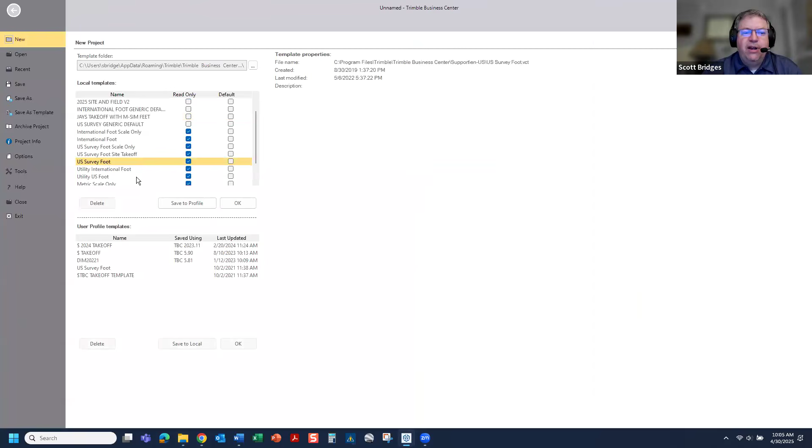You can start with File, New, and usually out of the box in Business Center, you've got some standard templates, such as U.S. Survey Foot or metric as well. If I hit Open to that, you'll see the blank screen and a couple of things as far as getting around in the system. I think this is fundamental in data prep for anything you're doing, and really fundamental in Business Center. How do you succeed?

There's really a couple of ingredients, in my opinion, in the secret sauce of Business Center. One is your templates, another part is your ribbons, and another part is really setting up some categorization tools. If you take the time to do that, you're going to have great success in Business Center.

Business Center is not complicated. It is very customizable. And here out of the box, you see all the choices open at the very top. So we're going to talk about thinning that down just to say, okay, we want to do data prep, whether it's data prep for takeoff or data prep for 3D models. Where do we go to do that? I'll try to slow down this morning to kind of go through some of these settings.

So number one, there are multiple places to customize Business Center. You can go to the Support tab, go to Options, and control your colors right here. Everybody sees a little different. Again, how do you have great success in Business Center? Maybe you struggle between oranges and reds and browns. Change your colors in your settings right here so they work with what you want.

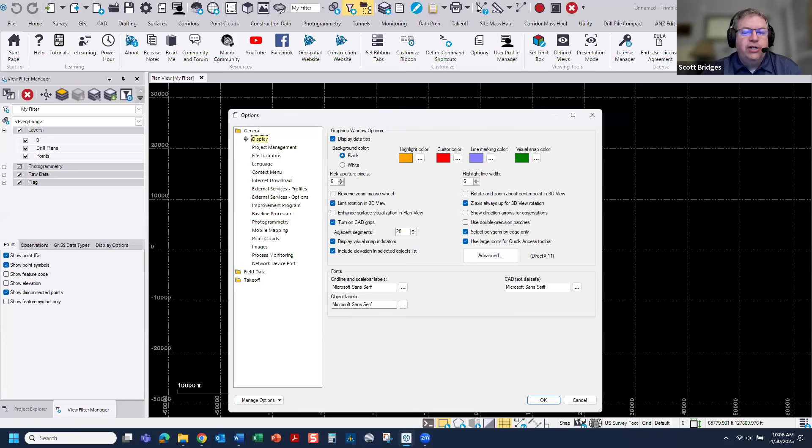Also, change your cursor pixel size. Make it a little larger, such as a 6 to 8 right here. If you've got a high resolution screen, it's easier to see. There's also, a lot of people miss it, a large icon item right here, which gives you the large icons to show up.

So a couple of things at the very beginning. You can show your quick commands at the top, or if you hit the very right, you can show them below. They're a little quicker to get to that way. So that's a couple of settings to start customizing.

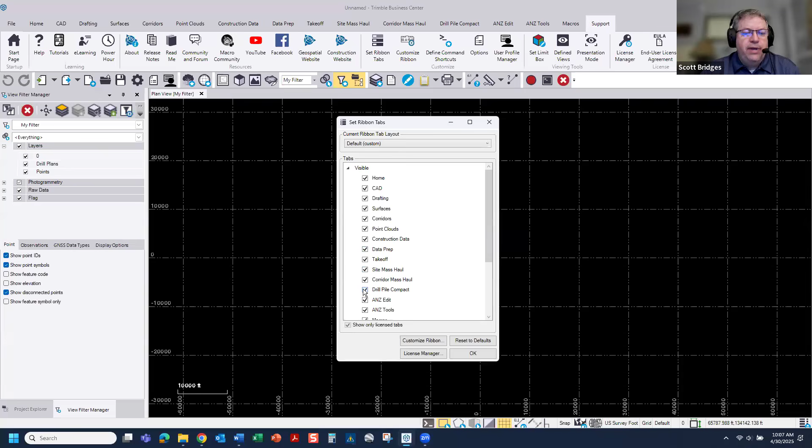The next part of customizing is you can set your ribbon tab. If we click the Set Ribbon tab, we get to see our options right here. What do we want to do? If there are things we do not use, we can turn those items off. As we turn these tools off, you'll see them start to disappear across the top. So we have different things we can turn on and off depending on what we're trying to do, and our menu gets smaller at the top of the screen.

The other thing we can look at as far as customizing is really our ribbons right here, not only the tabs, but the ribbons. So another part of that, to really get your workflow - if there are things you never ever use, I'm a big fan of turning those off. One of the tips and tricks: if you right-click on a ribbon and go into Customize, we'll go in and do a few things to show this correlation very quickly here.

If I scroll down, you see at the very top of my screen I have the Takeoff tab. On the far left, I have the Digitize options right here. Those show up right here under Customize. I've got Takeoff, I've got Digitize, and there are things I'm not going to do, such as talk to a digitizer. We can set these up and just hide those items - we can turn around and hide the digitizer setup.

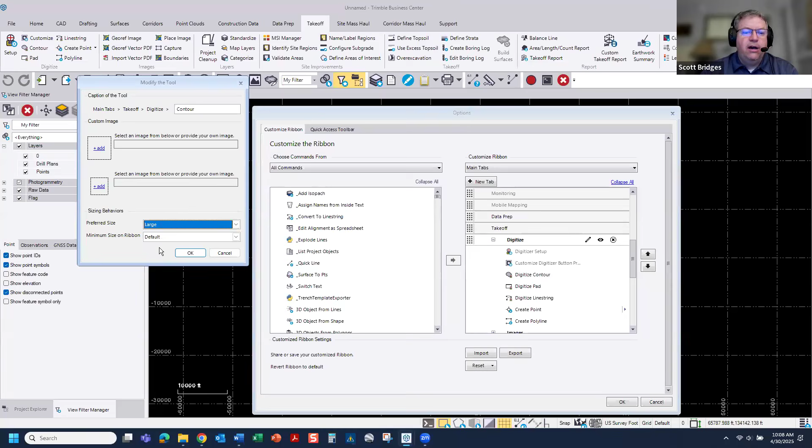We can also take an icon that we're going to use on a regular basis and make it a large icon. So this is the only one I'm going to show and do, and then you can move the order around. If we do that, before I hit OK - if you look at the top corner, the way it looks right now with this digitizer icon - when I hit OK, you see that it rearranges. So you can do that for every one of your tabs, every one of your ribbons, and rearrange it.

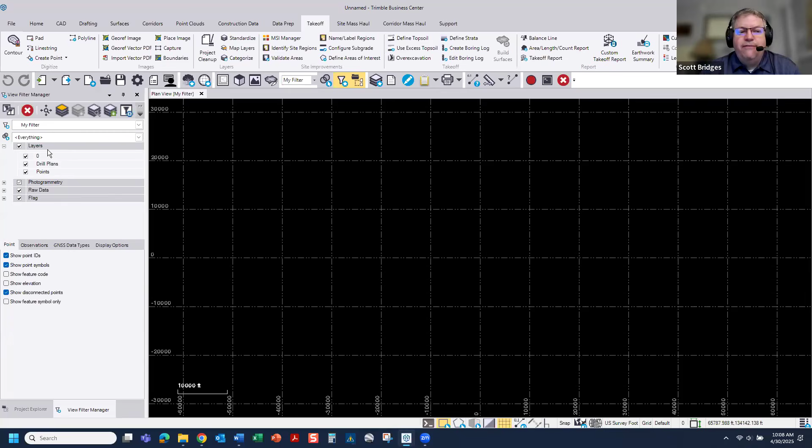The other secret sauce ingredient is setting up your layers ahead of time. Out of the box you just have a few, like zero and drill plans and points. If you want to do data prep, you want to have these built out. Early in my career I used to change layer names daily - maybe original ground today, existing ground tomorrow, then OG - something different every day. That's not how you succeed with data prep.

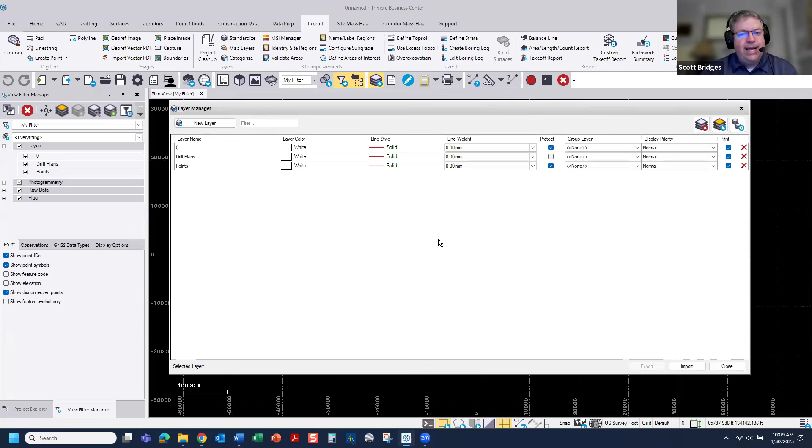You want to come up with a set of layers, and most professional data prep modelers have 100 or a couple hundred layers they use every day, so every file is identical. The layers for existing are the same, design are the same, and everything works exactly the same every time you use the software. So if you'd like to see how those settings work, here we'll go File and New.

Here's a simple construction template I made. After this is over, if you'd like to have this construction template or ribbon tab, feel free to reach back out to us. Albert's email will be up, and mine is as simple as my name, Scott underscore Bridges at Trimble dot com.

Here's a template. We'll open it up, and immediately you'll see that we have the layers in place. So here's the layers for existing and design, length area, trenching, and roadway and reporting.

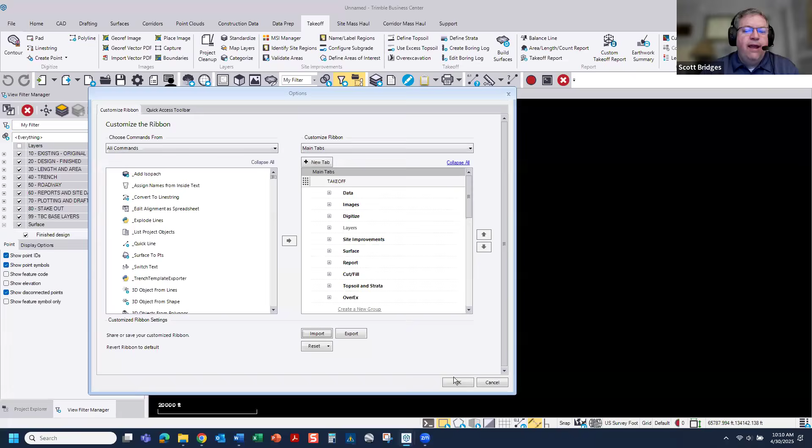Very simple. The other part to customize this is right-click on the ribbon - right-click on the top and you can customize the ribbon just like we did before. Once you've got that set up, we'll use Import, and here's one I've created, just this construction ribbon. If we hit OK, you'll see that we have greatly streamlined our interface right here.

These are the main tools I use over the last year working with a few customers and dealers. When I want to just do takeoff and data prep, I have it down to about 6 icons that I use. We can add a roadway if we need to, or utilities if we need to - those are easy enough to turn on and off under the tab menu. So that's a little bit of the getting going here.

Now let's talk about some data and bringing data in and using it. First, success with Business Center for any kind of data prep is having a wheeled mouse. With a wheel mouse, you can zoom in, zoom out, and right-click to pan.

Let me go grab a simple set of data to start with here. I'm going to take something as simple as a little DWG file right here - I picked it up years ago. It's a very small file, and I'm going to take it and drop it into the system. You can drag and drop to bring things in.

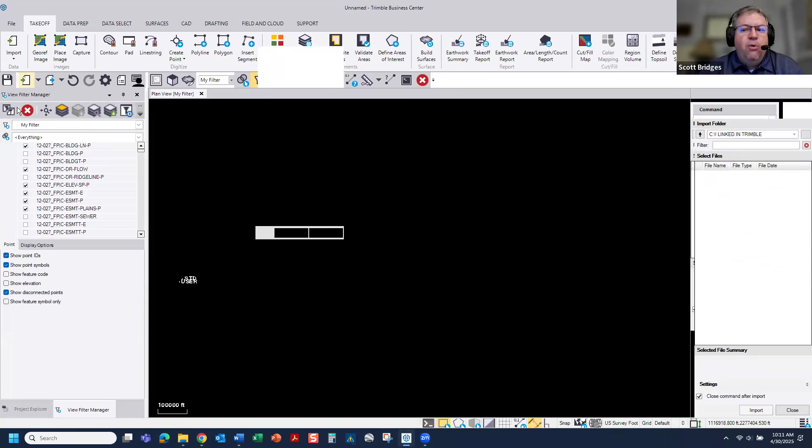Within Business Center, at the very beginning for data prep, you can drag and drop, or you can use the import option. Import is another choice - either one gets you your data. There's a couple more settings always when you use the import.

If we're talking all the tools of the trade for data prep, the import will let me go in, and when I pick a file on the side of the screen over here - here's a DWG file on the right side of my list - there's a little double caret at the bottom. If you take a moment to open that, you'll see all your settings.

These settings apply if you're using a PDF file - you can change the resolutions. If you're bringing in a CAD file, you can check your units. You can also add a prefix right here. So if I were to import 3 or 4 CAD files at once to work with, I could come in here and say File 1, 2, and 3, or Revision 1, 2, and 3. As I bring that CAD file in, you're going to see that information added to each layer. So some really good settings if you use the import options in TBC.

So here we are, and I have dropped in a very simple CAD file. Now what do we need to do with this data? If we look at our View Filter Manager, we have the Project Explorer and the View Filter Manager. Both of those I would keep open all the time.

These two tabs for Project Explorer and View Filter Manager are also listed at the quick command icons. One looks a little like a funnel and one looks like a file folder. These two I would keep open for everything that you're doing.

So we've imported a simple set of data. Now if you notice the layer list, some layers are turned on and some are turned off by default. This is based off the AutoCAD settings that brought them in. So if they were turned off in AutoCAD, they're going to be turned off in the system automatically. You will see the layers on versus off right here. I'll go ahead and take a moment and turn all the layers on.

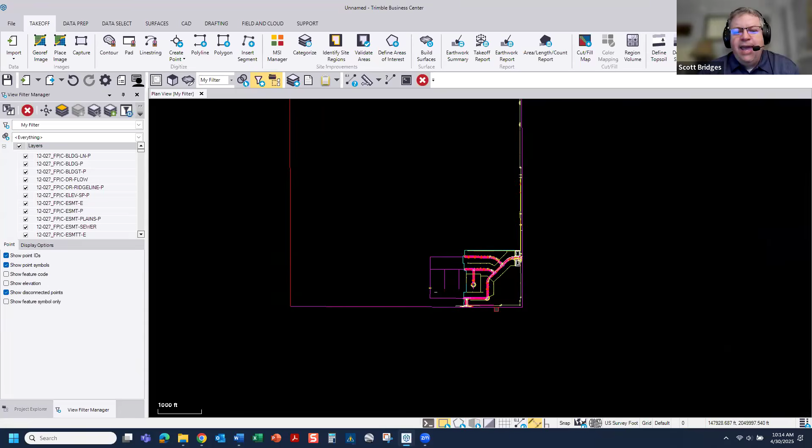So odds are that data is not part of the same file. Some data could have been a 0,0 or an insertion point. The data that I want to get to is on the far right side right here. I'll take the time to zoom in and look at my data. So here's what I'm after. Again, there's data over 2 million feet away.

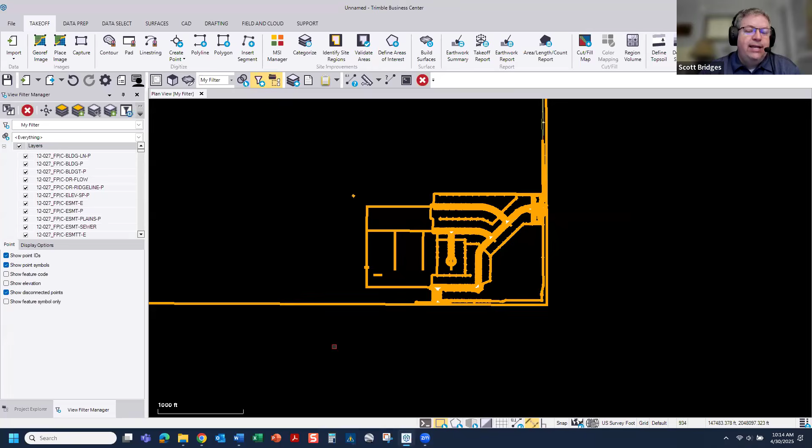What's the easiest way to manage that? In the past, original kind of CAD 101, you could kind of bite it off like an apple and delete, delete, delete. But here what we're going to do is just highlight the data that we want. If you highlight the data from left to right, it selects what's inside of your selection. If I go from right to left, it's a crossing select and gets everything else that it touches.

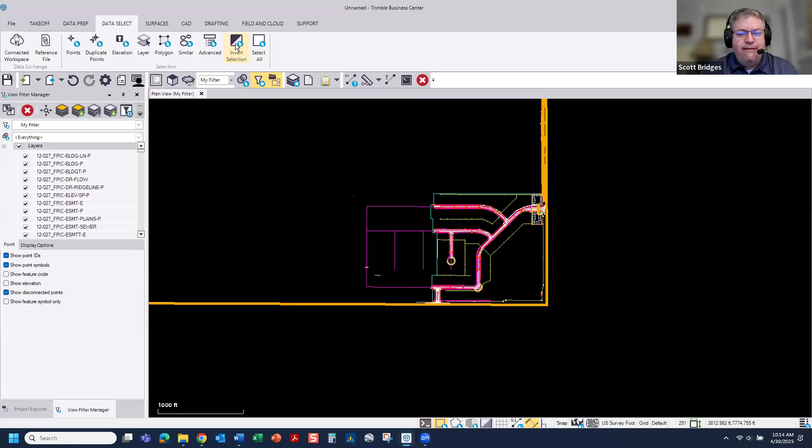So I picked the data that I would like to use. There's a great tool in TBC called invert selection. Invert selection will take the data that I have and flip it around, selecting everything else that exists in the entire file. By flipping that invert selection, you see it's got data outside of it and further away. If you look at the bottom, you can tell how many items that was, 291, and I will hit delete. By hitting delete, it zooms in and gives us just the data that we want right here. So here's the data that we're after.

You can also use another tool to start with for cleaning up data, under data prep. Data prep lets me go through and use project cleanup, and this is going to really wash through and clean up that whole file. But before I run this command, I want to take a moment and look at a few things. If we look on the left side of the screen, we can kind of see all the layer names. And if I keep scrolling down further and further, you see there's a tremendous amount of information right there. There's a lot of layers.

Probably not data on all those layers, but we're not sure yet, so we can use data prep to clean those up. And project cleanup will go through and take this list of layers. I'm going to take everything here, and I want to remove the duplicate lines, the overlapping lines, and the unprotected layers. That means the CAD data that was brought in, we're going to clean those up and remove that data. So let me hit apply.

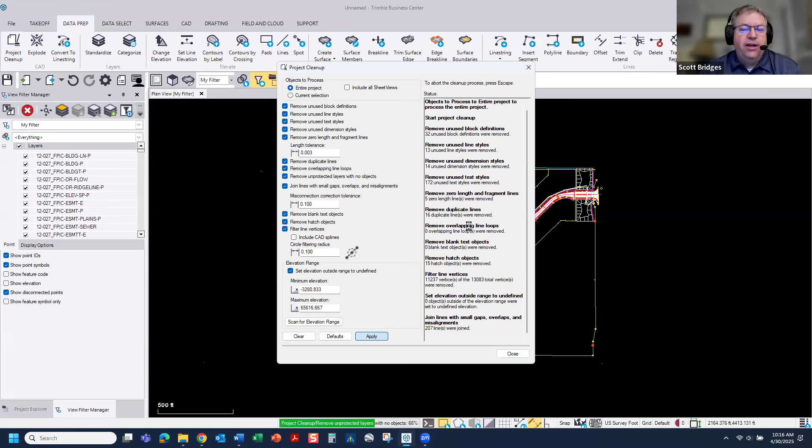Let me do the entire project and say apply to that. And we'll go through and take a look. 16 duplicate lines were removed. Good luck trying to find those that are duplicate.

We can also remove vertices if our lines are extremely dense. That is a user choice depending on what you're trying to do from a modeling standpoint. We can join lines, but the big one to look at is there were over 600 layers with no data whatsoever. So we just cleaned up and removed those 600 layers with no data. Now we're down to just data on our particular file right here.

One more thing to look at in this particular file before we move to another exercise is the fact I'm a big fan of, under View Filter Manager at the very top.

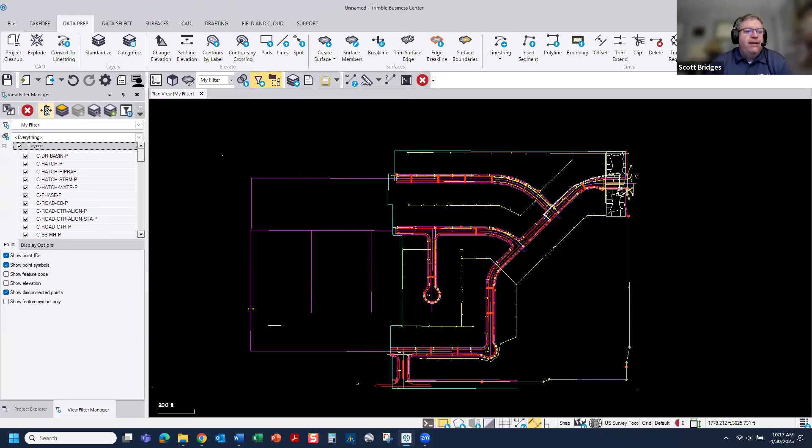If you look at the top, you've got a couple of extra choices, including Zoom Extents and Isolate. These are extremely valuable when you're working with your data. If I hit Zoom Extents and Isolate and start at the very beginning, that picks my very first layer. Zoom is on and Isolate is on.

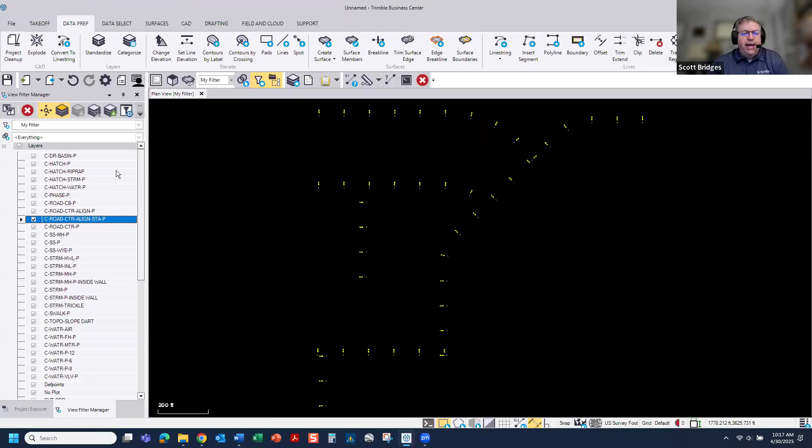By doing that, just using the down arrow on your keyboard will scroll through and let you see what's on each layer individually. So you may have something as simple as one piece of text or one line, but you can scroll through and see that data, look for what you're after, delete data, edit data, and manage data.

So that's a couple of starting points right there from data prep: realize you can take a really big file, go through the project cleanup, and get rid of the empty layers. Also, click through your layers using your zoom and isolate to pick the data that you need. So that's exercise number one that I wanted to share.

Now I want to take a minute and talk about bringing in some more PDF data and elevating some information. We'll take a few minutes and do that. Then we're going to get into a larger CAD file and we're going to do a pad and volume. We're going to see if we can get all that done in about 30 minutes right here.

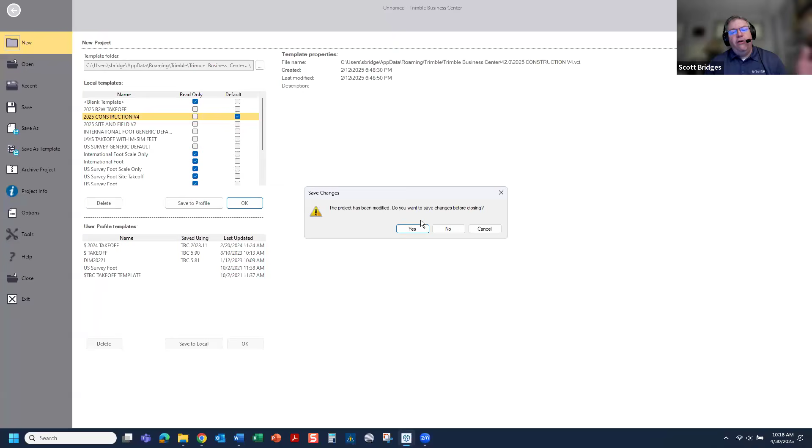So let me hit File, New. And again, now I will use this template, so all the other settings are turned off. Here we are with an empty file yet again. So now you have a couple options: if we want to use the import option, we can use the import, or we can drag and drop.

If you're working with any PDF data for any reason, if you're trying to match it together, if you want to match together a PDF to CAD to verify your information, if you want to stitch together multiple sheets, use the import option. A lot of people may not realize this, but by using the import, selecting a PDF...

If we look at the very bottom in our settings right here, number one, we can change the resolution on the data. Here I've made it a 300. Also, you can select the page number. If you happen to have a PDF that you want to work with, and that PDF is in a large magnitude of 50 or 100 plus pages, there's no reason to bring all of that data in. You may just need a couple of sheets. You can go through just like printer sections and say page 1-5, or page 1, 10, 20, however you would like to import that data.

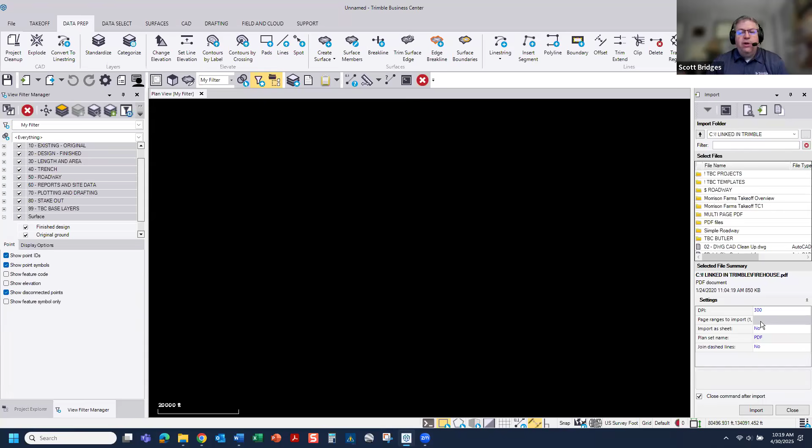So here we'll import it. Really what I want to show here for just a few moments is the concept of managing your data and even data prep, even if you were doing takeoff for just a moment. So here we have a PDF file. First thing you would always do is scale it. If you bring in a CAD file, you're going to have that information already in the right coordinate system.

Here we'll take this PDF, and I am going to click 2 points to scale it. Now, at this moment, I don't know if it's rastered or vectored. We're not going to go through a takeoff exercise. Actually, we're doing that one month from today, where we'll just go through and put in existing and design and do a cut fill calculation.

But what we're going to do here is look under Project Explorer. Whether it was a CAD file or PDF or anything, we can see that we've imported data. We would see we've imported CAD data as well, but right here I've got a PDF.

Just so you know as well, when you're working with any kind of PDF data, on the left side you'll see a V, or either it will be blank. A V means that it is vectored data. So vector data, something should exist and I can extract out of this to work with.

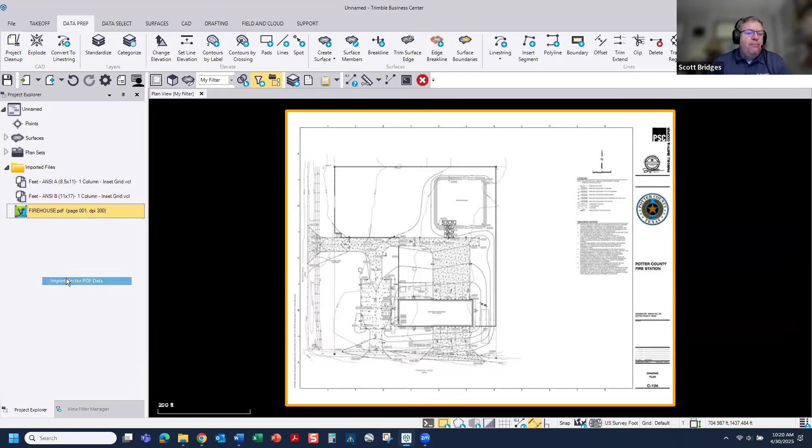So right here, I'm going to right-click on this data, and we're going to import the vector PDF data. So we'll go and import, and what I want to do from a little data prep on this is just to show how to standardize the information and put existing on existing and design on design. You would use the same information for CAD data, and also you would use it for any kind of model building as well. So when we extracted that data, we see that we've got a lot of information on our screen right now.

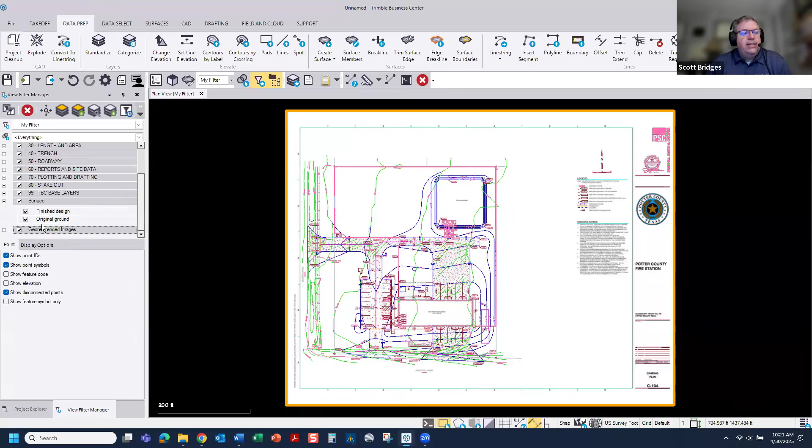This just shows up under the native layers that it extracted. Let's take a peek at it, and here's how much data it extracted right here. So it pulled out this much data from that PDF without me having to do any digitizing.

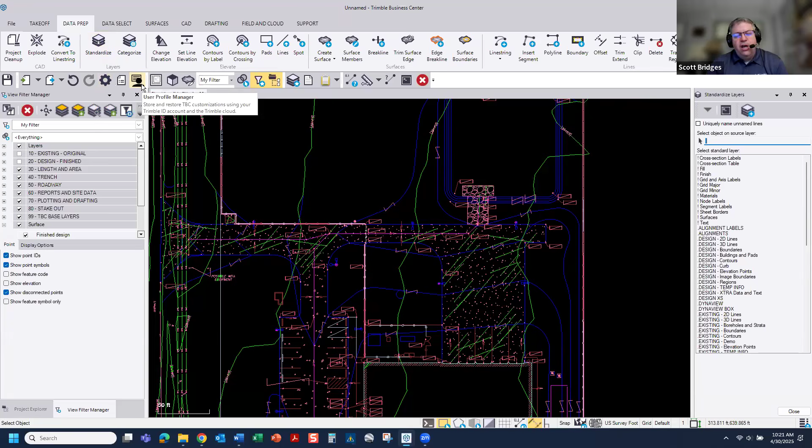A couple little tricks: if I turn off the layers I created in my template, my existing and design layers, nothing is on those yet. What we want to do briefly is use a standardize tool. This is a great place to start for any CAD data or PDF data where we want to put things on our particular layers, because if you change the name of existing or design every time, there's no consistency there, no way to win. So we really want to make sure everything's consistent.

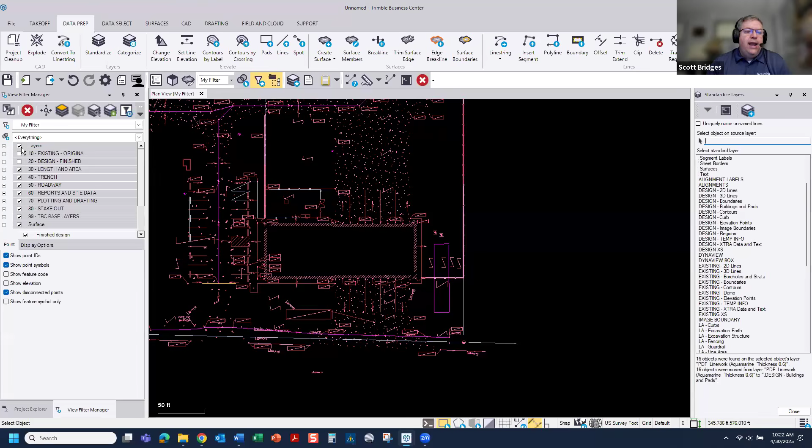So if I click on one of these lines, if it came from a CAD file or any other source, I can assign it to be existing contours, and it will move it to the existing contour layer. I can also pick lines one at a time or in groups. Here's another line that needs to be design contours, and if I zoom in here and click one more spot, this would actually be a design building. By moving those over, now we can turn off all the other data that exists, and just turn on the data that we want.

There's the existing data that's kind of messy at the moment. That will be a takeoff exercise in the future. Here's some of the design data, and let's turn back on that georeference image. So really, for this exercise from data prep, I just want to show a couple things.

The name of the game for all data prep is turning 2D data into 3D data. That's what we have to get to, 2D to 3D. And there's a couple of tools available for you. So really all I want to work with at this moment in this file for this exercise is coming up with the elevations on this apron right here, just around the edge. So a couple of things we have to do.

If I click one piece, we can always check properties. So if I click on an entity on the screen, I see that it's on a layer I would like differently. I don't really want it on design contours. I want it on another layer, and it's broken into individual pieces. So how would we go through and clean this information up so it's ready for us to use? It's a very simple process.

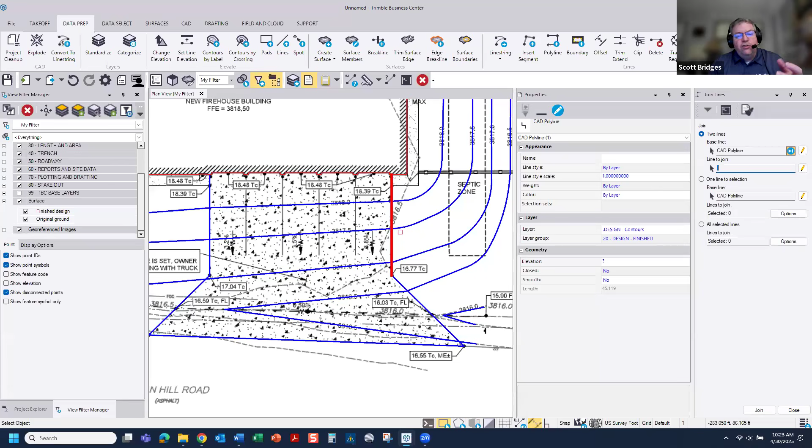I can click, and do this one of two ways: use Control and click each piece, or right-click and immediately join. Either way, I would like to do that. Here's where that thickness plays into your settings, you can see the line is wider, and I would like to join that piece and these other two pieces right here. So we'll join those together. Now that is joined into one entity.

So I've got it joined, but now I'd like to change the layer of it. Instead of contours, I want to turn that into a curb where it's supposed to be, and we'll turn everything else off on the design right here. I'll turn everything off except design curb. So what we have on the screen now is one line that we can take a look at.

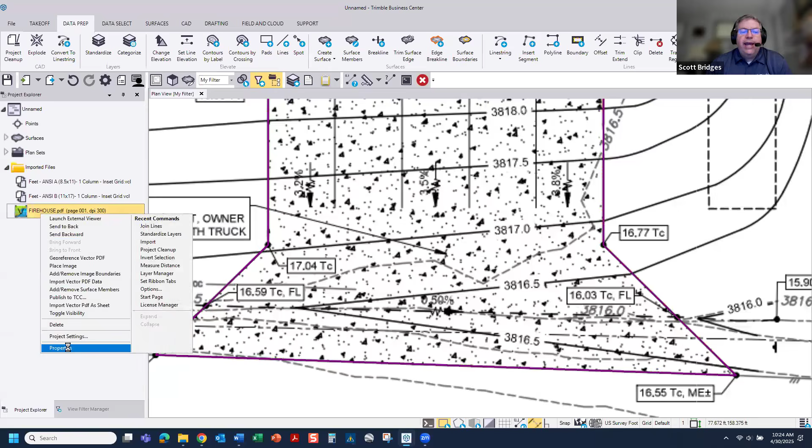Another great tool that's available if needed: here's this line, I'll highlight it so you can see it on the screen a little bit. If a PDF is a challenge to look at sometimes, there's another couple of settings people have missed as far as data prep goes. If I have a PDF in the background, I can go into the properties of this PDF. One of the properties is you can change the transparency, and also change the visualization style. Here, I'll dim this PDF so it's a little darker so we can see the work a little cleaner on our screen.

At the moment, I don't know if this is 2D or 3D data. I do know it because I extracted it from a vectored PDF, but if you want to also know whether it's 2D or 3D, under Display Options, under View Filter Manager, we can come in here and change this.

So I could say if my data is not elevated, show it in an alternate color. What it will do is show everything that has no elevation in red, or pick any color you would like, a yellow or another color. I'll try to show that in just a couple of moments how we can do that.

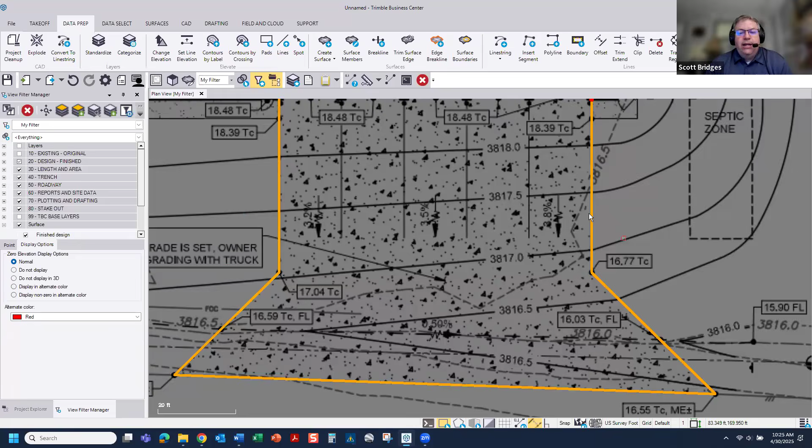So let's go, how would we elevate a simple line on our screen? Number one, we can click it and go edit it. If you right click, edit is an option within your settings right here within TBC. So we'll right click and say edit, and this lets us grab our information, and we're grabbing node to node.

This is really what I want to show for just a minute. Number one, which way does the line go? If we look, we see a little crow's foot arrow on the screen, so this line is drawn in a clockwise direction. If we need it changed to the other direction, we can simply reverse the line direction right here at the top of Edit Line String.

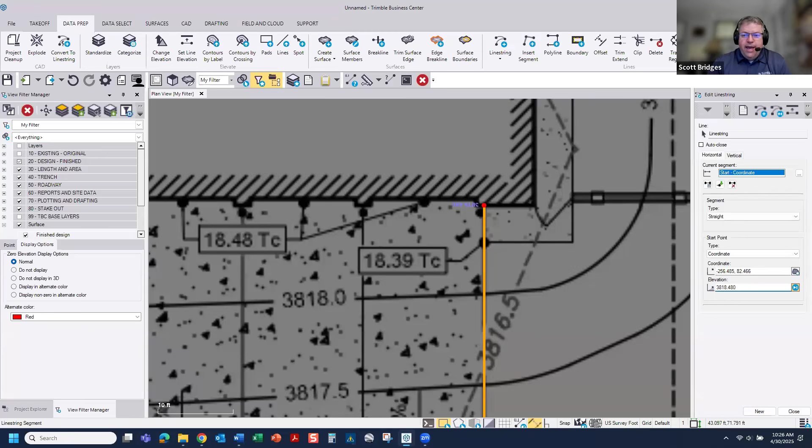But I'm going to grab the very first point, and that elevation should be, there's a 38 at the beginning of these. So this particular starting point, if we zoom in, let's make that 3818.48. That gives me a starting elevation of that particular line, 3818.48.

If we go from here, the next point that I can give it, node to node or intersection to intersection, is down here. So if I assign that a value, that should be 3816.77. So we've assigned two of those.

But there's a couple things we're missing, and we're missing one in the beginning. We're going to have one that we're going to come up with and need at the end. What are some of the tools that we've got for this?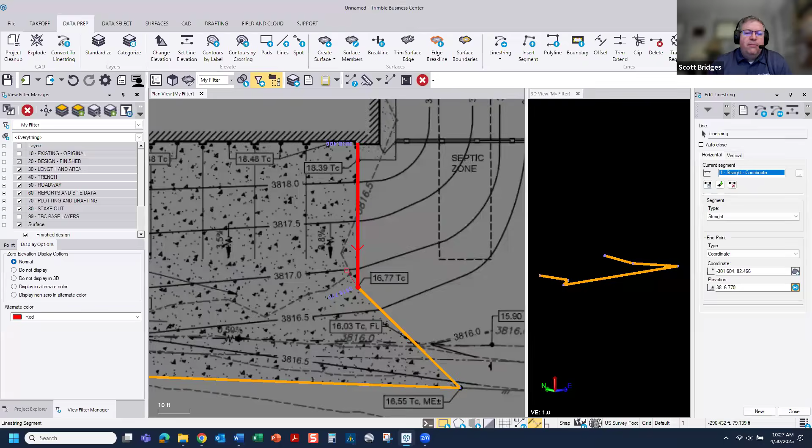Number one, we can also work in 3D view and see the data at the same time. So here I'll open up and see that we've got a piece of this line, and it only has an elevation at the beginning and second point. Let's go in, and how would I elevate where I don't have a point location?

On the right side under the Edit Linestring, so far everything I've done has been under the horizontal control. Horizontal lets me click point to point or node to node, basically from vertice to vertice right here. But if I go to the vertical tab, if you notice in the Edit Linestring, there's a horizontal and a vertical.

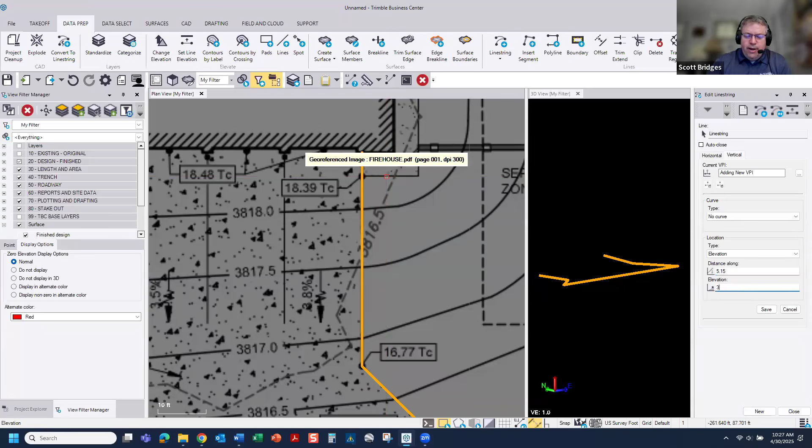If I go to the vertical option, it is letting me rubber band, as you can see on my screen, anywhere that we're working, and I can come right here, and we could zoom in extremely tight if we wanted to, and at that particular point, I need a 3818.39.

That gives me a different control, which you can see in the 3D view, and you can also see from the plan view. Then we can come in and add another node. Right here, I'm going to click at this spot and make it 3816.03, and so on and so forth.

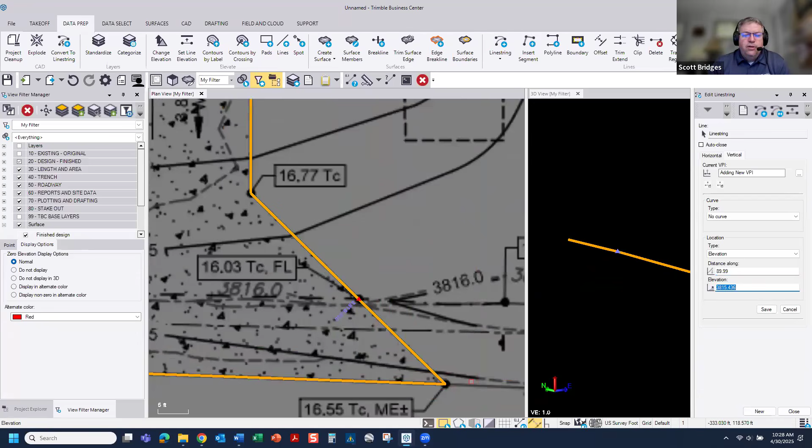So this lets me go around and add specific points anywhere I would like on a line right here. So that's really the exercise I want to show specifically here, that you can interact with a PDF file, you can extract data from the PDF, or you can tie a PDF to a CAD.

Either one of that can be done right here, but as you go to edit a line, not only can you edit it at a point-to-point, node-to-node mindset, you can also, anywhere along the line, edit by going into the vertical tab. So a very key part in doing any kind of data prep tool right there. So I'll pause with that one.

The next exercise is let's just talk about how we would elevate a lot of data and how we would quickly put a pad on from a volume standpoint. So we'll come in here and do one more.

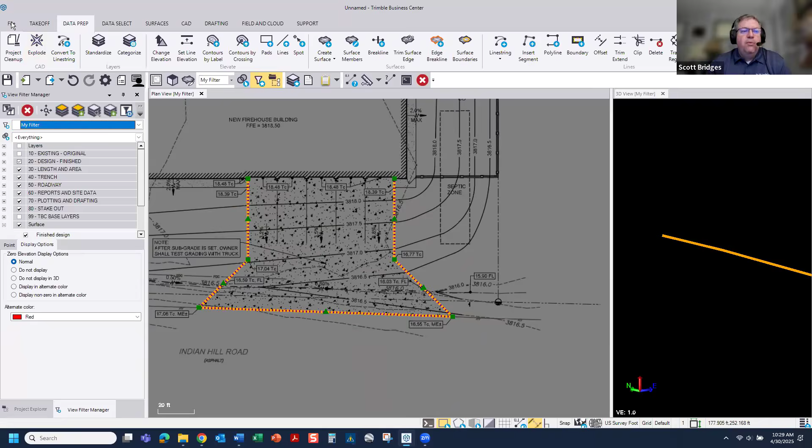Let's go File, New, and I'll use my same template. As you see, I have to move very little between menus by having a custom template. So by having a simple template right here, everything I get to do, I get to stay in one or two menus, and I don't have to bounce around from place to place. So it makes it much easier to work with staying in a small spot right here.

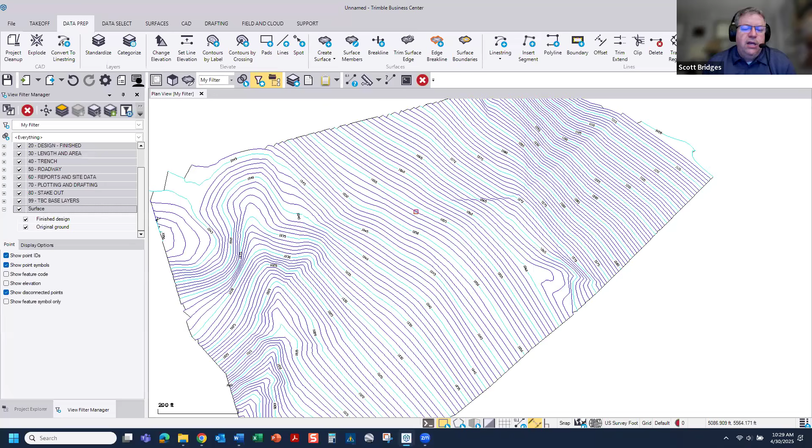So let's go through an exercise on bringing in some data, and let's turn a large set of data from 2D to 3D so we can see how we're working right here. I'll bounce around between my screens, black and white, depending on what you're doing. This is a setting at the bottom that you've got access to right here.

So here we've got a set of contours. You can see they have elevation labels, but at the moment we don't know if they are 2D versus 3D. We don't have that information. So a couple of things we can do.

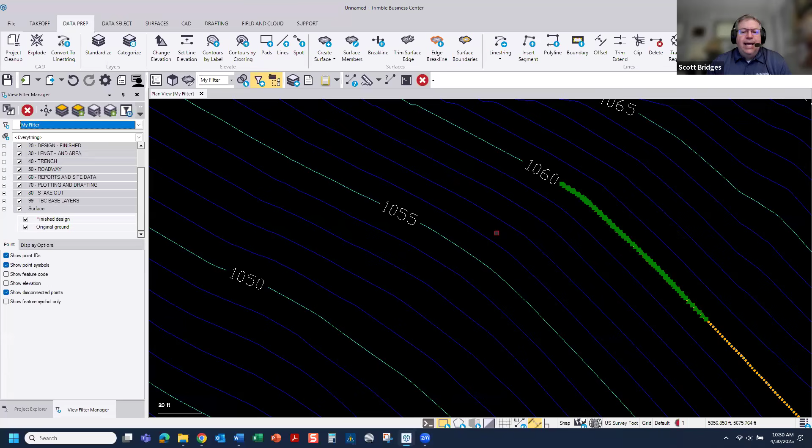We can click a line and right-click and go into Properties. So if I click this line and right-click, I notice there is no elevation in the geometry section. Maybe I just picked the wrong line, maybe it's an anomaly. So if I go pick another line, we see also it has no elevation. I'll pick one more, and no elevation. So all of a sudden I realize, even though this is a labeled file, there's no elevation on it.

So now we need all the data prep tools to convert this from a 2D to a 3D and get a file elevated so we can use it for anything we would like to do. What order would we do this in? How would we manage this information? Well, first I would go through the same process on data prep here, and I would standardize my data.

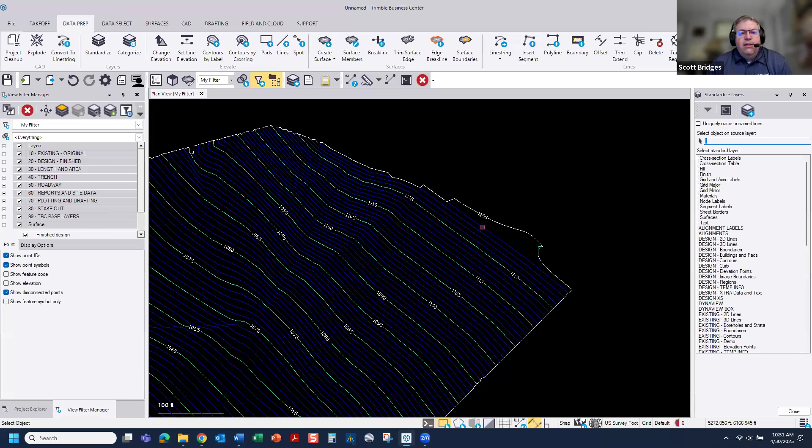I would pick this information on the screen, and I would turn it into my design contours. I can pick the other information and turn that into design contours. I can turn these labels into design contours too, and move things wherever I would like to work with that data. So let me take this text right here, and we'll move those to design text. There we go, so we've got these moved over to whatever layer we would like.

We can turn everything else off. We still have two-dimensional data.

Now we want to go through the data prep process of contours by label. Right here is the command, contours by label. First we pick by layer. So if we pick by layer, I select all my contours and all my labels right here.

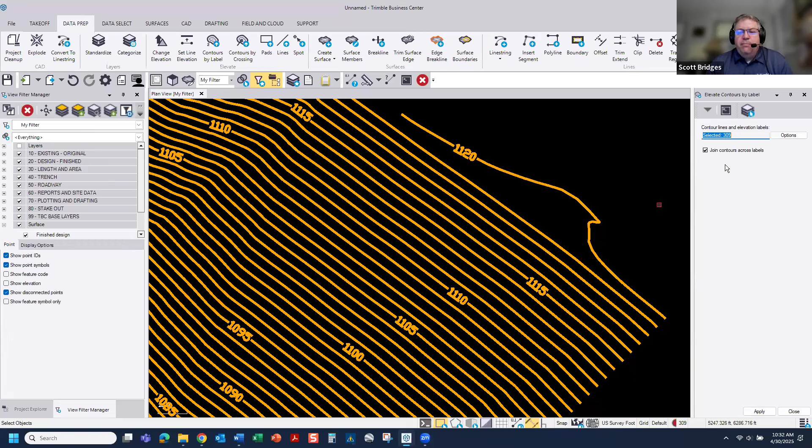By picking those, it's going to say, do you want to elevate? The tool we're using again is data prep, and we're doing contours by label. We pick our lines, we pick them by layer, we pick the text, and we want to apply. And it immediately elevated 107 lines for me automatically. So it uses the labels, and it does it.

But at the moment, it's tricky to see what's 2D versus 3D. I can't really see that at the moment. I'm not sure which one is 2D or 3D. So let me look at it a couple of different ways.

Let me turn on a 3D view and show this information. We can see this is my plan view, and if we turn it, we can see the 3D. So that's the 107 lines that we've just elevated on our surface right there.

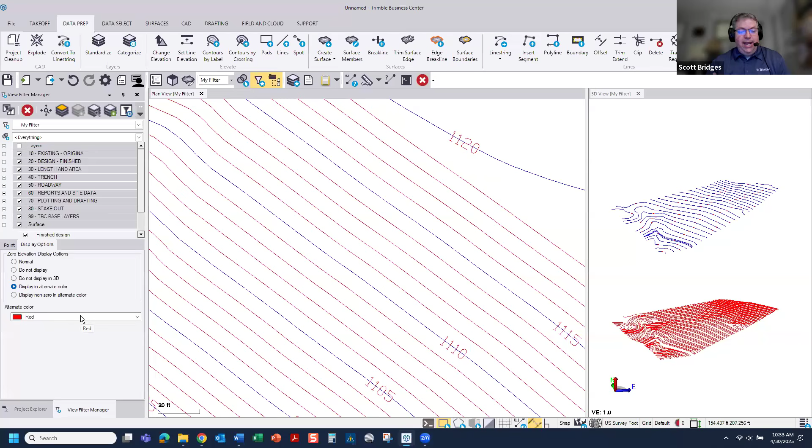But now I'm not sure which ones we've elevated or we haven't. We can go back to the display options under View Filter Manager and show in an alternate color. And it shows now we see red lines. These represent, if red happens to be the color that you want or need or the native layer, you could change it to something different right there. If you wanted to pick a totally different color, you have access to do that as well. So here we have changed it to yellow in this example just to show something different.

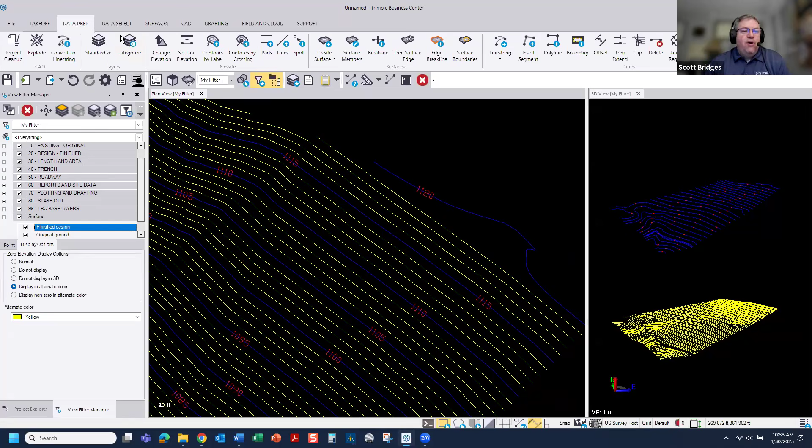And now we want to elevate the rest of the data along here. What are some of those tools? Under Data Prep, we've got the ability to do contours by crossing. So first thing we did is by label, now we're doing by crossing.

By crossing and elevating, we need at least two known elevated lines. So the blue ones are elevated. I will strike a line across here, and it will elevate all those. We just immediately elevated 16 contours. If I don't like the snaps on or off, that is also an option at the bottom. We have a snap choice right here to turn data on and off. So we can start to see what's elevated and what's not.

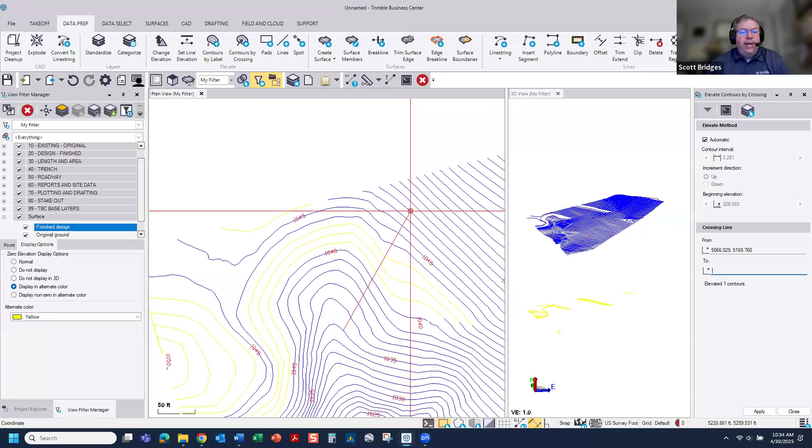A couple of things you want to do: you don't want to strike along the text because it would elevate the text, and it could be in the wrong spot. And you don't want to just swipe a line from one end to the other because you may have an area that goes up or down, such as right here. So we'll go through, lots of thumbs up right there. So great, there we go. We've got some elevated data.

Now what do we want to do if we want to get rid of the two-dimensional data? If we have extra data that we don't want or don't need, or it's not a part of this file, we can go through and take a look and say, okay, this is all the data that I'm after. It will select that data. If there's anything we missed, I'm going to elevate in 3D and select in 3D over here, and it selects 7 entities that did not have elevation. We could either elevate those, or in this case, for an example, I'll just delete them.

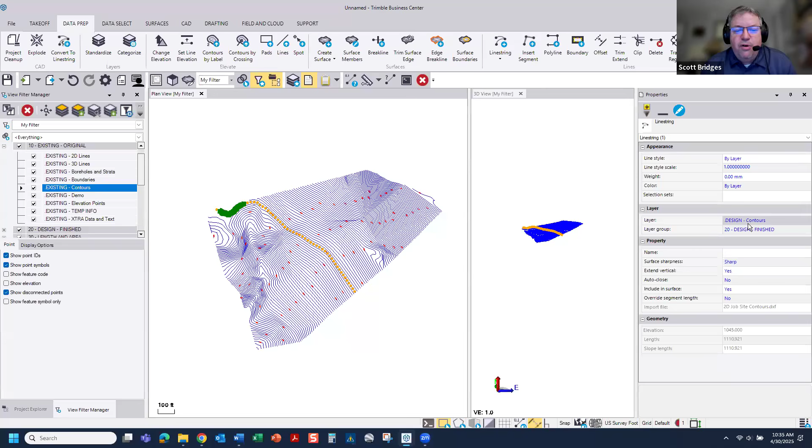Because I took a moment, and again back to some key features, I put these on a known layer, I moved them over to existing contours. That's where these are located. If we click and right-click and check properties, these are listed on existing or design. I guess I put these on design contours. That's perfectly fine, but we could put them on existing or design.

By doing that, we have a tool where you can just automatically hit build surface. By hitting build surface, it doesn't have a boundary yet, but build surface will automatically create that surface without me having to go in there and select the data, go into surface, and say create a surface.

The reason we can do that is by having these layers, using the categorize tool right here at the top. If I have drawn things on the existing layers on the original, it's going to use any of these to build that surface. If I've drawn anything on these particular layers called design, it will use any of those layers to also create a surface. So if I take the time to categorize my information, existing and design or original and design, and put it on there, when I hit build, it will use all of these layers to automatically create that surface. A lot quicker process than grabbing my data and going into surface and creating a surface, and that gives us that information very quickly right there.

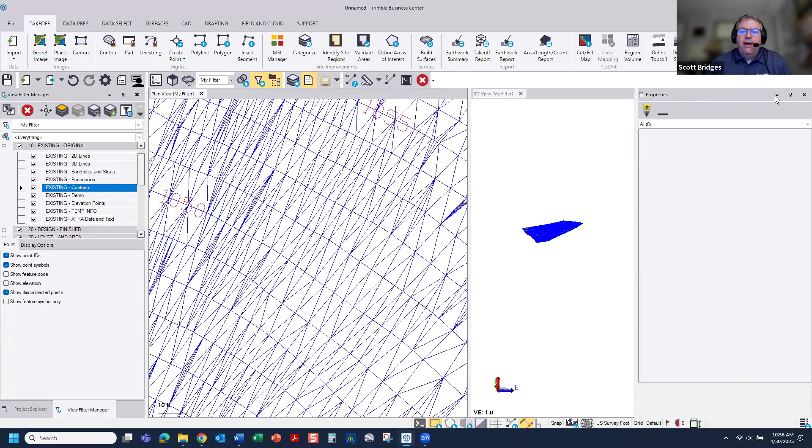So you can turn around and see what we've created. So here we are with a surface. I can turn that information off so that we're not looking at it, and now we've got some lines to work with.

Let's look at a couple of settings on here if we take a moment to look at a few more things in detail. Here, if we click this line, you see that it has created that data in specific increments right here. If I click on this line string, let me go into properties. We see that we've gone through and created it based on the data that exists.

What if we need a tighter control for that design? What if that design needs a much tighter control? Maybe it's the edge of pavement, maybe it's the bottom of a building, and we need tighter control there. What you can do is override the segment length, and I could make it 1 foot if I wanted to. If I made it extremely tight and rebuilt that surface, you're going to see that particular line now has a much tighter densification control on our site for a tighter surface if we need it.

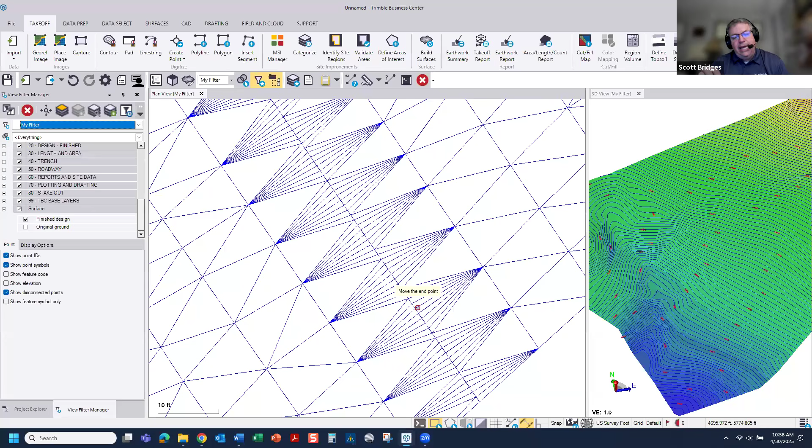So we didn't have to go through and change any overall settings in the software. We can just override the segment length of a particular line, and when it rebuilds, we're going to have that tighter control right there. So that's a couple of other tools. Let's take just a couple more minutes and show you a few more features, and we'll use this site to do it. Let's say we need to do some designing.

We can come in here and under my CAD tool, I want to create a rectangle, and I will put it on a design layer. I'll put it on the design building. What elevation do I want? If I just pick somewhere in the middle of my contours right here, it grabs that elevation. But TBC always does the math as well in the background. So right there is a 1050.

If by chance I needed it to be something else, I could say plus 2.5, and it will add that to come up with my new number. So your math is available.

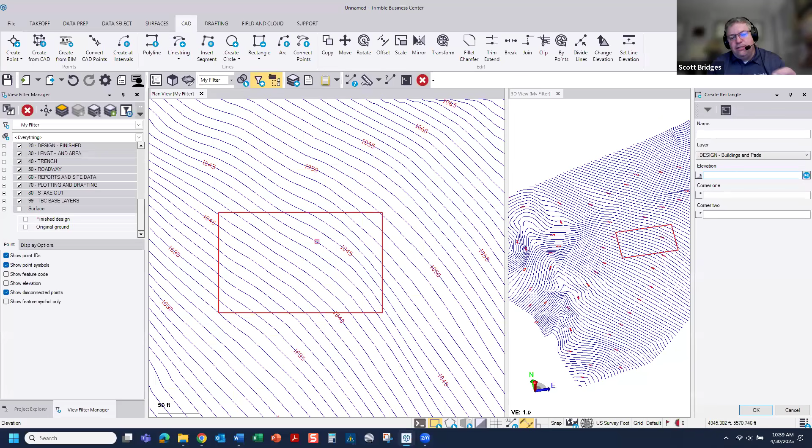Also, if I click a location on the screen, and I know some design tools to where I have a starting point, but I need to use a certain size, like a 100 by 200, anything I'd like specifically right here. If I have my known point to begin, my corner 2 over here, I just enter that information. I could enter at 125 space at 200, to go from my starting point up 125 over 200. Hit the enter button, creates that automatically for me. So we can use the at space at to come up with an exact location right here.

So now that we've got that, what else can we do from a designing standpoint? Well, I would like to tie this pad to my surface. How is that going to interact? How will that information tie together? That's under our surface tools.

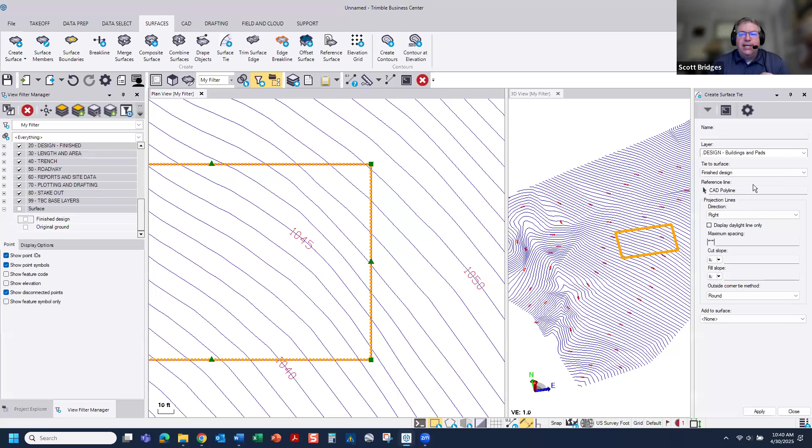So if we're creating these surfaces for machine control or takeoff or anything else, I would like to create a surface tie. Basically, I would like to use this line that I created right here, and tie it to my finished design, the surface that I built. So I'm going to tie it to finished design using this particular line. Do I want to tie on the inside or outside or the left or the right? I'm going to click on the right.

I'd like a tie point at least every 5 feet. If I'm in a cut area, maybe I want a 3-to-1 slope. If I'm in a fill area, maybe I want a 2-to-1 slope. So you can change these settings and hit apply, and it generates how these two surfaces will interact right there. So if we're trying to build a file for the design applications, how do these two touch base? How do they talk together? That's how it works.

But not only can you do this, if you're into design build, as many people are, you also have a couple extra tools right here where we can click this. If I right-click in Business Center, you should know some of the basic tools right here—it gives me the items I can do to that particular entity. If I click a line and right-click, I'm allowed to edit, break, join, offset. If I click an image, it gives me my choices right here.

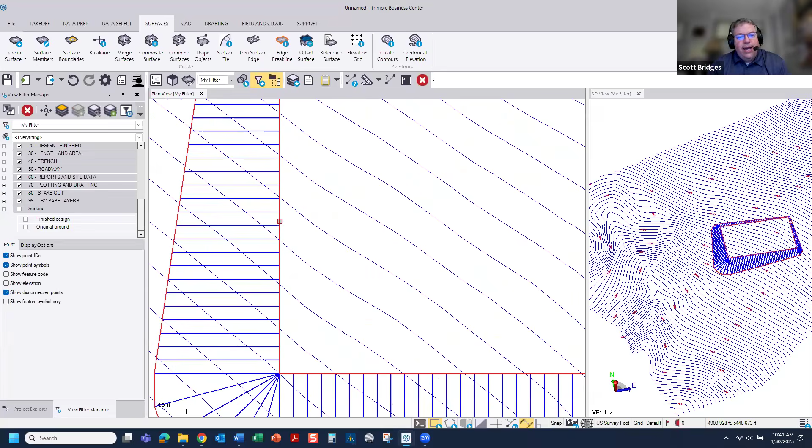But a little Easter egg—if I click on an entity, like this line again, and use my Shift key and right-click, it brings up a whole nother set of commands you have access to right here. I can also copy and move and scale and rotate many other things that aren't there just by using your standard right-click.

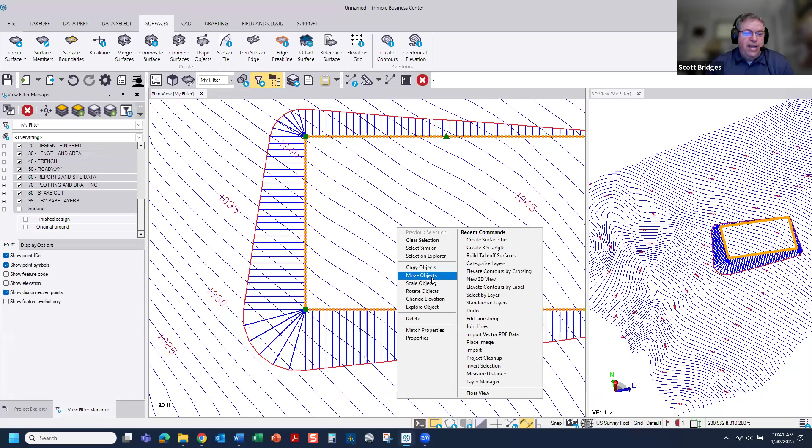So if I would like to move this entity, maybe I have some known boundaries that I need to work with, I'm going to come in here, and if I click, it allows me to see how these two surfaces interact—how the cuts and fills would take place—and we can see that information directly on TBC. So there we are, and we've moved this to a new location.

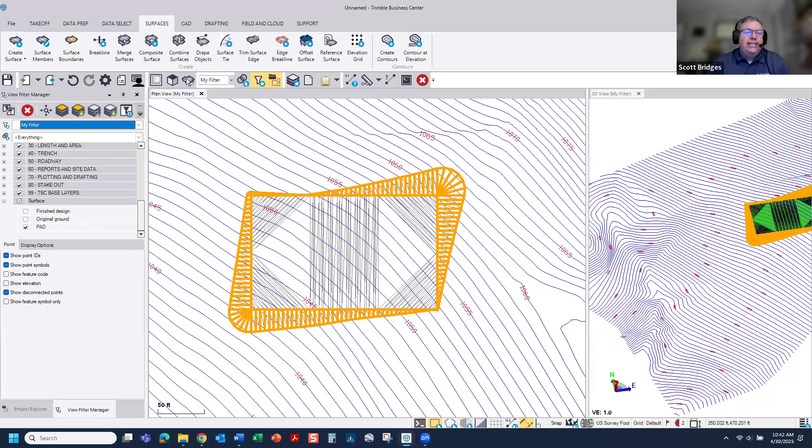If you click the first one and hold your control key down, it lets me do multiple points from a surface slicer right here. So holding control down lets me do more than just clicking from A to B. I can click anywhere I want to get that information.

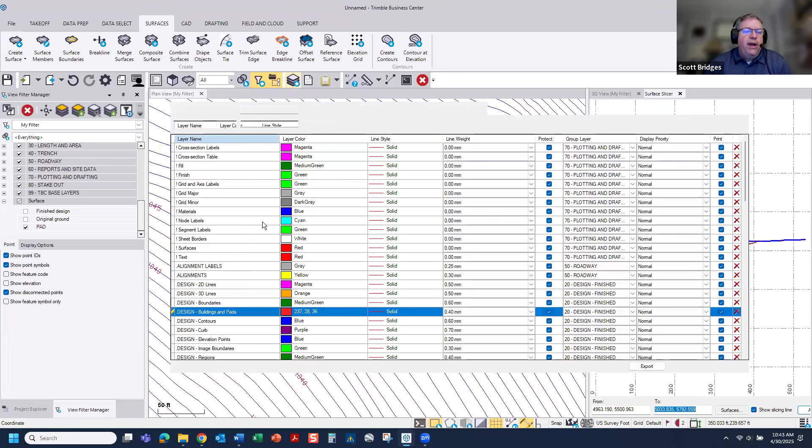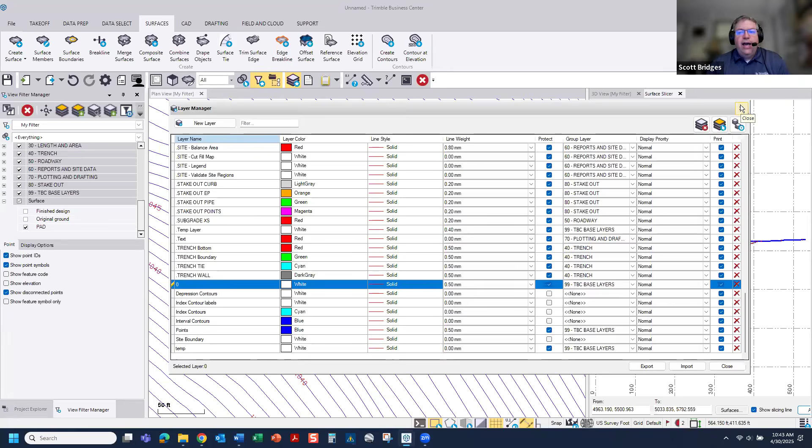Another item to notice is we have very thick lines that show up in our surface slicer. The thickness of my surface slicer is actually dependent upon going into Layer Manager, and whatever we've got our original layer 0 set at. The line weight of layer 0 is the thickness we get using the surface slicer. So I don't ever do anything on layer 0, I don't draw on it, but changing that thickness allows you to see thicker lines created over here, giving you some extra information while you're looking at it.

So that's a couple of the tools, surface slicer, and then we could quickly finish if we just needed a quick volume on this to look at and wanted some information. I could come in here and do a quick earthwork report, actually from a volume standpoint, a surface to surface comparison, comparing my finish to this pad, and get a quick surface volume on how much cut and how much fill, giving me my import, export, or deficit or excess. So we can do a quick report using this information.

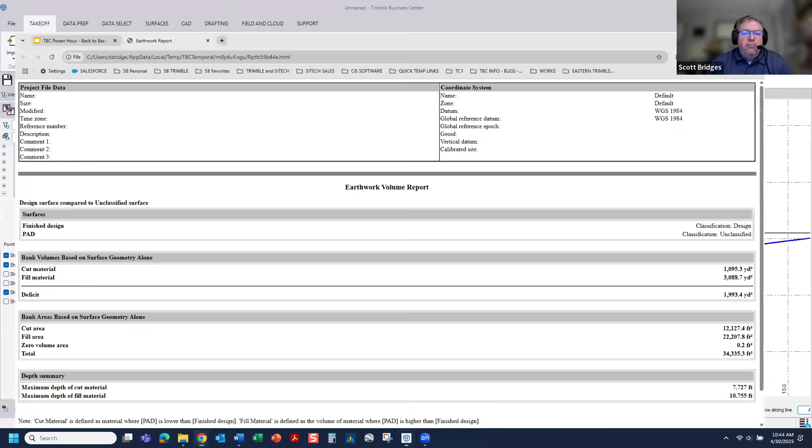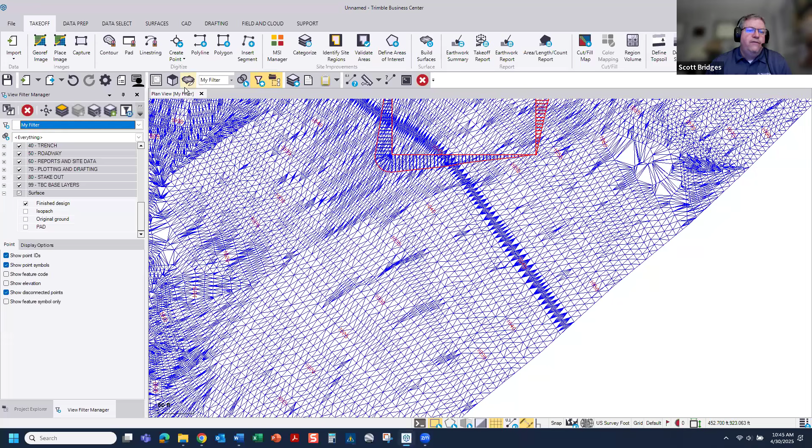And several more things from a designing standpoint - another tool I think is very handy here. I'll turn all of this off so we can see pretty much this original site again for just a moment. I'll wrap up, I could talk all day, so I'll try to find a landing place here shortly. But another tool - if you take a look at this surface from 3D view, here's this original surface. You can click on it, and see the details by looking at the triangulation.

Another couple of things - if we go into the properties, not only can we see the triangulation of this surface, but there's another tool if you're into the designing or modeling, if you have to do a parking lot, or something where slopes are critical so you don't have flooding or set up bird baths for sloped areas. You can also look under your properties.

If you go down to your 3D view, there are some shading areas you can change, but let's look right here at shade by slope range, right at the very beginning. I can say yes to shade by slope range, and say I'd like to know everything between 0 and 5%, and it will quickly highlight everything between 0 and 5%. If I've got to find those areas to make sure I don't have flooding, to make sure it's not too flat, those can easily be seen in 3D view or plan view by going in and changing those surface settings. So a couple more tools from the designing standpoint.

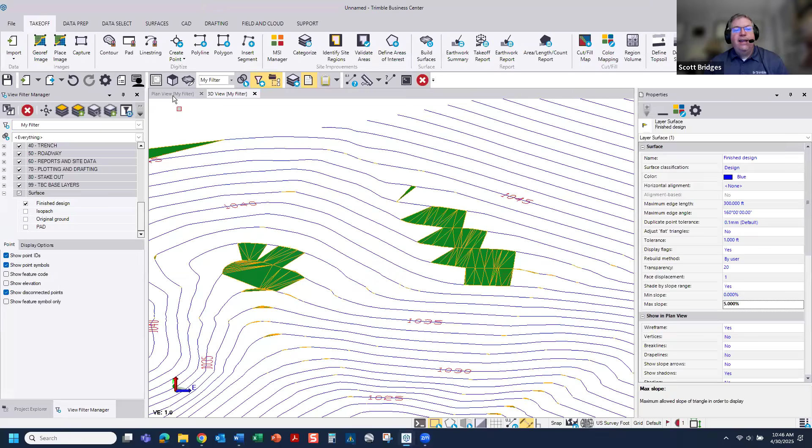So as I kind of land the plane here this morning, what have we talked about? Really from a designing standpoint, you can import CAD data. You can right-click on that CAD data and elevate it just by changing the elevation. You can also use all of the data prep tools to set lines, to change them from 2D to 3D. You can also label using labels, and you can also change a line with multiple elevations by going into the horizontal and vertical control. Those are a few things.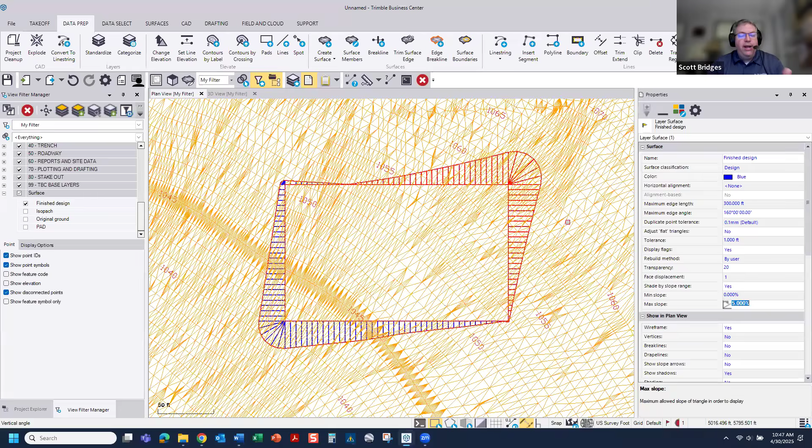One last thing - this has all been site work. There are also people that do plenty of corridor work. Some people don't realize the tools built into TBC from the corridor standpoint. I'm just going to use the same screen, slide over and show about 90 more seconds, and we'll land right there.

Just in case you're a corridor person and need to do CAD work, I'm going to come in and do a line string. So if I go in to do a line string, I would come up with a name for it - maybe this is alignment 1 - and I would decide what layer I'd like to put it on.

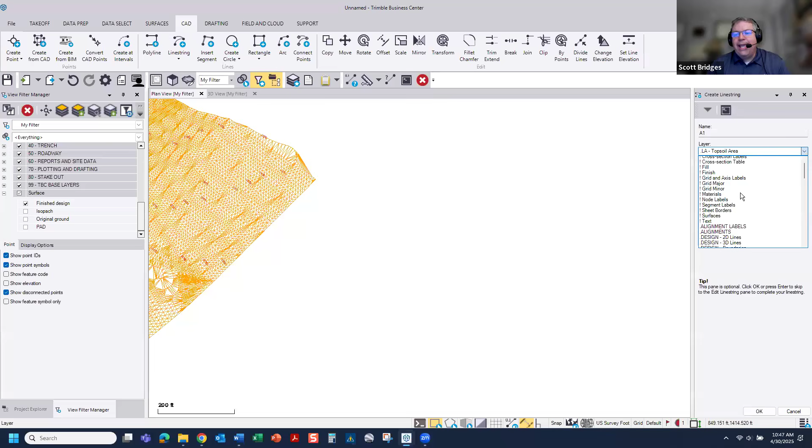An easy layer for a lot of this work is I have alignments, one part of my template right here. I'll say okay to that.

What's step 101 for just creating geometry in TBC? Number 1, what is my first coordinate? I could pick a point, or I could give it its known northing and easting, whatever that might be. A lot of people do not realize you can actually enter elevations and northing and eastings all at the same time right here. Let me undo that, and let me put a coordinate that starts at elevation 475, right here.

So there's my first point. I'd like to enter another one now. I can enter north 45 degrees east, put a space bar, and enter 300 feet. So from that first point, I'm going to go north 45 east, 300 feet, hit enter, and it creates that second point. I could go from there north 90 east if I wanted, and say I'd like to go 200 feet and enter that.

All your coordinate geometry is built right inside of TBC while you're working. If you know the elevation of your final point, you can enter that, and you can finish this up. Going back and editing it again, you could take these straight points and change them, putting arc values in here. Here we'll put in a 50-foot radius.

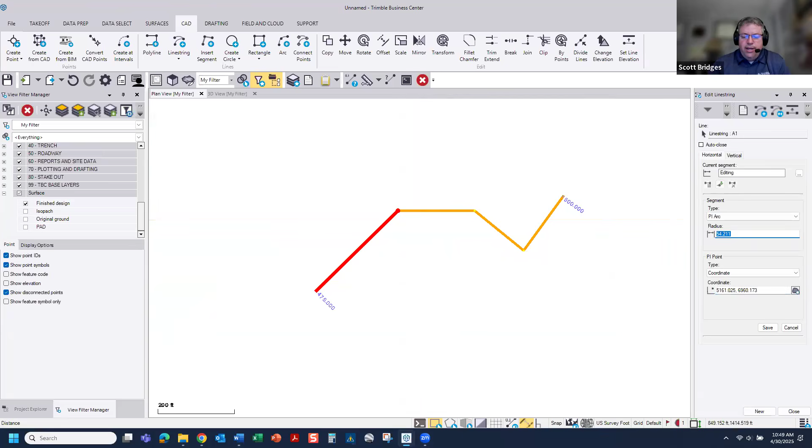Here I'll change this straight right here. We'll go in and change it from a straight. I'll put a 75 radius in here, and this last one we'll change to an arc, and I'll make it 35 and hit enter.

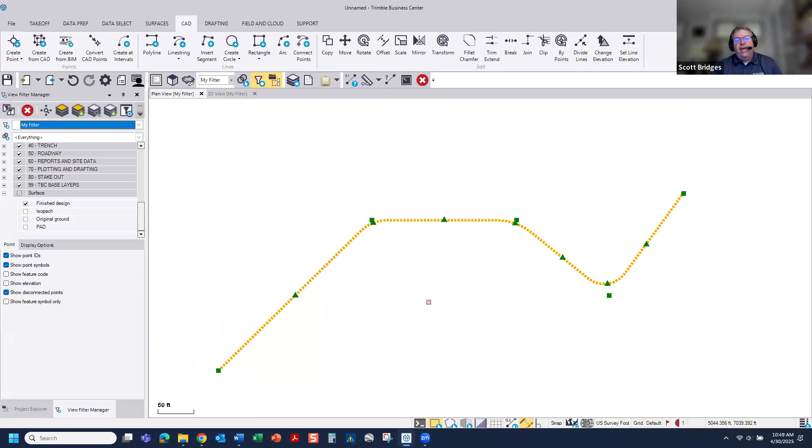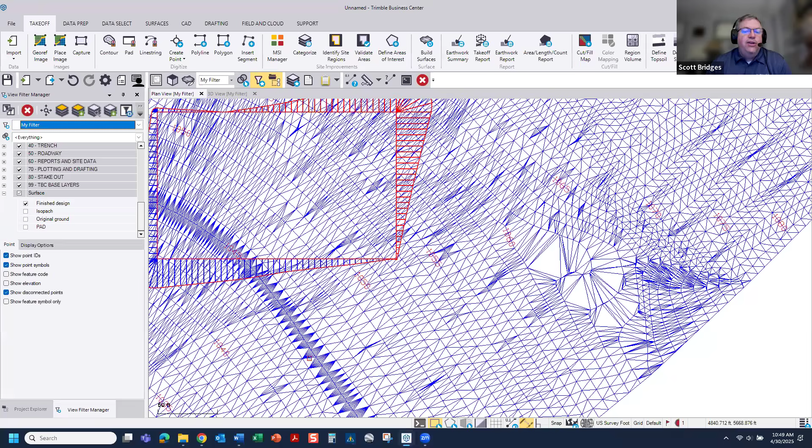So that lets you see not only from data prep can you put in 2D data, convert it to 3D data, and turn around and create surfaces — either use surface, create surface, or use the settings under categorize and put data on existing and design, using the build surface tools. You can also edit the data prep of the surface by controlling the triangulation, the densification of your surface, and tie together different surfaces and run volumes. Again, just a few of the highlights of TBC in the background.

Many, many more to go. Albert, I'll pause right there. I appreciate everybody's valuable time and hope this is a good little tutorial on some of the features that exist. We're about an inch deep into some of the design tools and ability built within TBC.

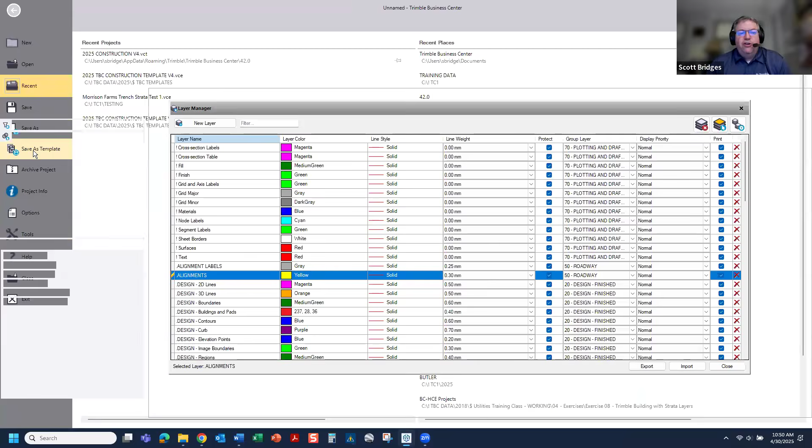If you've built a layer manager where you've gone in and built all your layers, the best thing to do once you've built out your layers is go File, Save as Template. That's an easy way to do it right there. You can also save it to your profile. If I hit Save As, you can set it as default, and I could save it as a template here just in Business Center, or I can use my TID and save it to a Trimble profile so it's on the cloud and the web that I can use.

Another great point is if I add 5 new layers for some reason — say I come in and build 5 new layers that I've created right here — a lot of people miss this. I missed this for years, but let's say I build a template and I've been working with it for a few days and I've added several more things. Take the new layers you've built, highlight them in Layer Manager, use the export at the bottom — that's a little button everybody misses. It will export just those layers. Open back up your template that you've created, use the import to bring those layers into your template, and resave it as a new template. So anything you add, grab them, export those layers, put them back in your template.

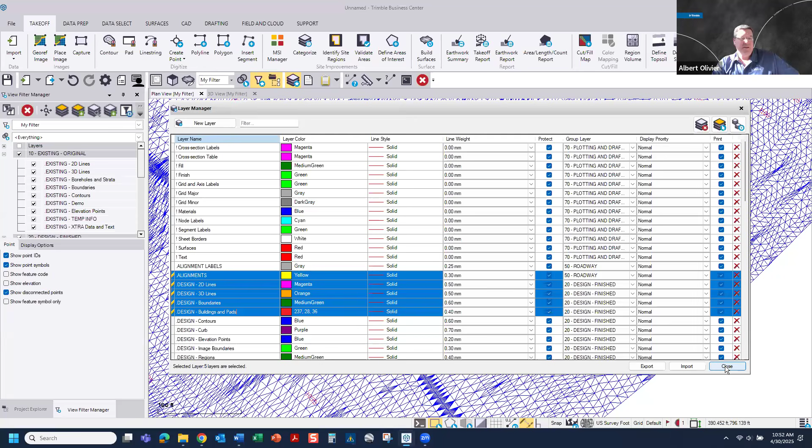Is there a possibility from IFC files to create surfaces? Yes, we've enhanced IFC files a lot. You can import an IFC file, and if it's a surface, TBC will be able to read it. We've also added, in the latest release, the ability to create IFC from any CAD or surface entity in TBC. So you can now export IFCs from a surface or CAD entity that you select in TBC.

Create line, no, not that one. I'll have to go look for it. I don't have my TBC app, but there's definitely a command you'll be able to find to add that.

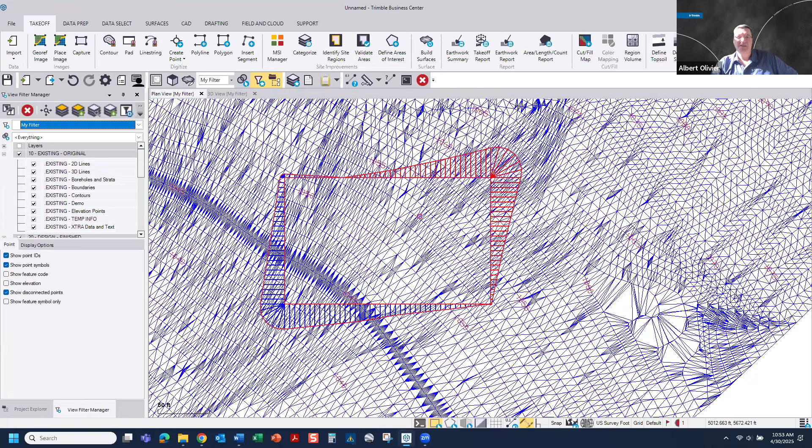I see we're almost done with time, but there's one or two things. I did pick up somebody asking about a surface manager, so that is something we are discussing at the moment. The biggest question we have, if anybody wants to reach out to us, is what kind of groups would you like to see for a surface manager? Is it just design surfaces, existing surfaces, or on a weekly basis? How would you like to see that Surface Manager operate? There are a lot of people who will have different ideas on how that should work, so any input you can give us would be great. We can definitely look at that, as it's come up quite a bit.

I think that's it for me. Quickly go if there's anything else.

Andrea is just asking how you type in coordinates when creating line strings. So if you just want to quickly show that again, Scott.

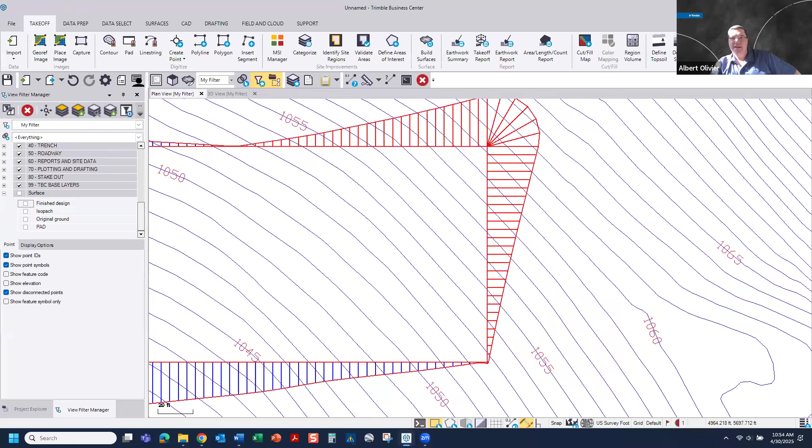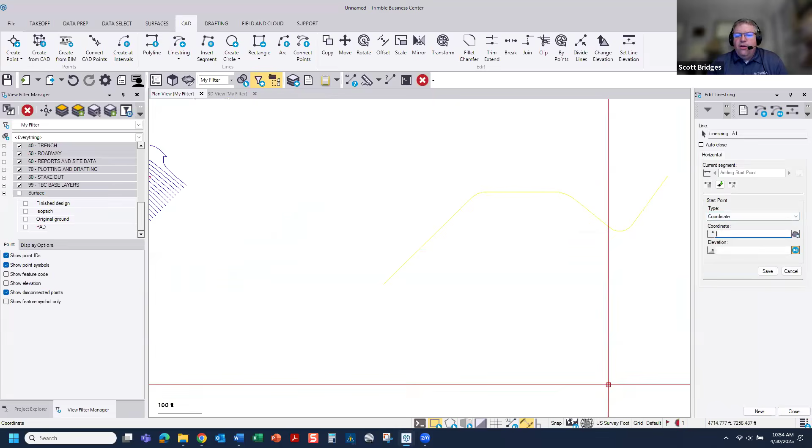Absolutely. If you're under CAD or anywhere you can access the line string command, here's the line string command. You can pick a name and a layer, but it will open up and prompt you for a coordinate location and an elevation. From a coordinate and elevation standpoint, if I know my beginning elevation, such as 100, and my first coordinate, I just pick a location. So here is my first coordinate, whatever the northing and easting is.

From there, you can enter any coordinate geometry, like north 45 east. I can give it a space, so north 45E space distance. Right here, north 45E 200 gives me that particular line. If I want to go north 90 east, there's N90E, no spaces, then a space and a distance. So here's N90E space 125, and I hit enter. That's how I enter coordinate geometry right in the coordinate box.

The one secret is to make sure auto prompt advance is on, which you only have to do once and it stays on forever in your system. On the elevation, turn on the auto prompt, and you'll see it highlighted in blue. That lets you move ahead with your coordinates as you enter them.

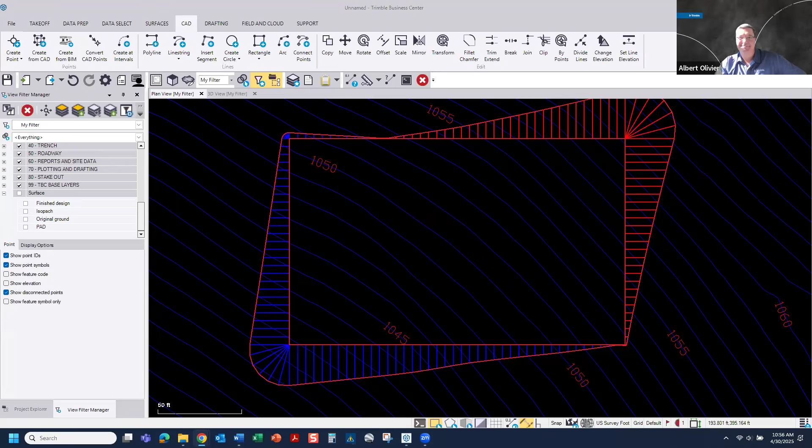Scott, if we can just go back to the presentation quickly, I want to jump onto the resources. Hang on, I'm grabbing it here for you. Let me pull it up and skip to the right spot.

So if there's anything specific you're interested in and you want to test it out, if you haven't done a 30-day subscription trial license yet, by all means use that, and you can have a look at all the modules in TBC for 30 days.